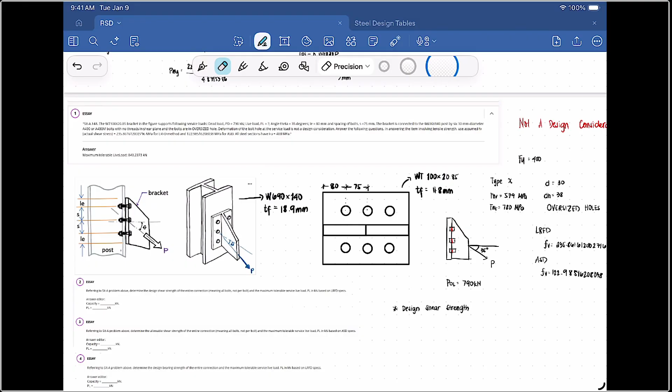So here we have WT 100 by 20.85 bracket. Let's go straight to the figure. So this is our figure. What's being pointed out here is the column, that is 690 by 140 with a thickness of flange of 18.9 millimeter.

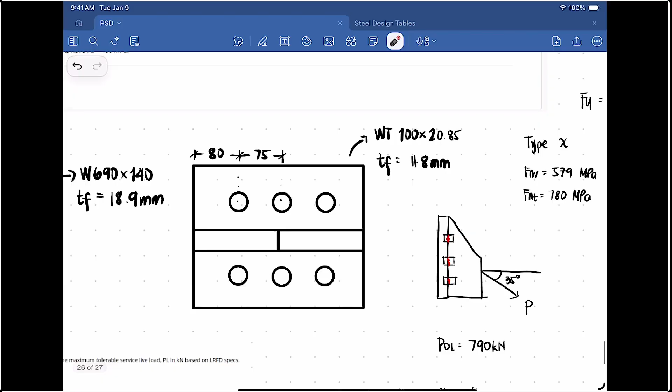So next is what connects to it, which is this. This is its top view. Here we have the bracket that was used, that's 100 by 20.85 with a thickness of flange of 11.8. It has an LE of 80 and spacing of bolts of 75.

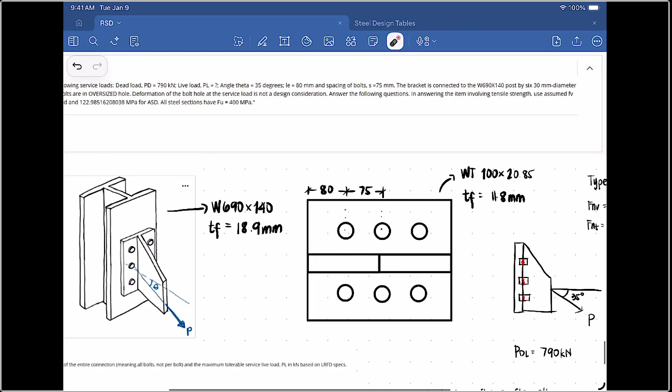And that's it. So the load, by the way, since we can see it here, theta is given as 35 degrees. So therefore, we are expecting a force combination of tension and shear.

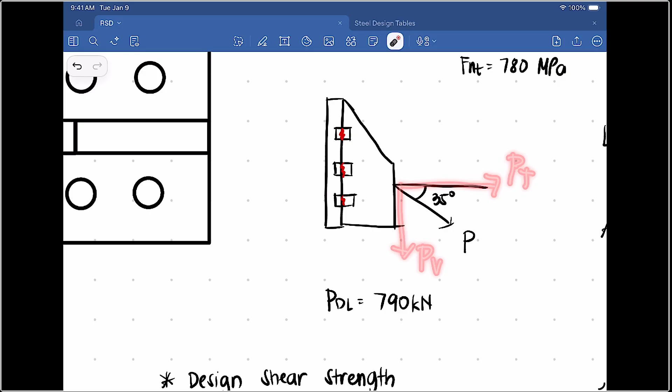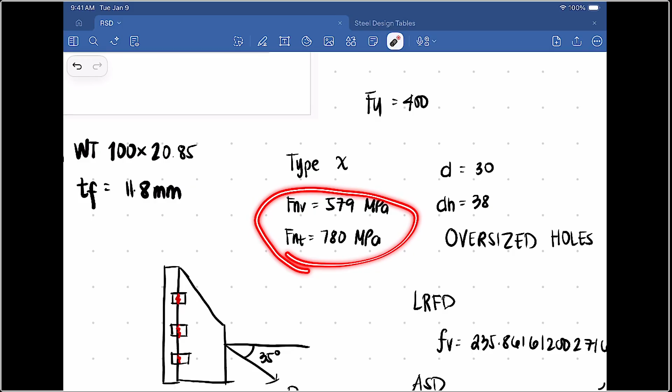So since we're using type X and it's 490 M bolts used, and it's oversized, our FNV and FNT will be this one, based from the table. So the diameter of bolts is 30. Since it's oversized, we add 8.

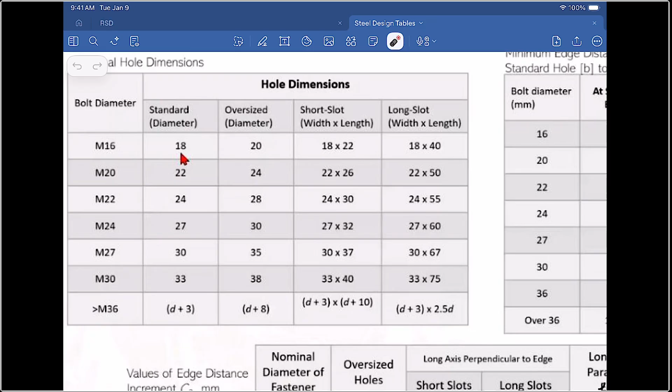We can see that here in this table. So we have 30 millimeter bolt diameter. For the hole dimensions, it becomes 38. So we have critical shear stress here in LRFD and ASD. We also have FU of 400, and it is not a design consideration.

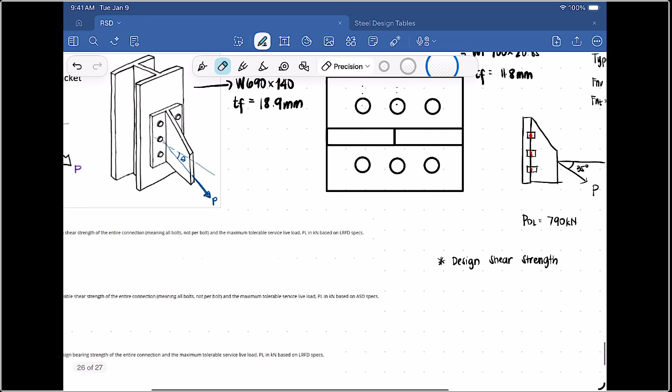So okay, let's proceed right away to number 1. For number 1, we're looking for the design shear strength. Let's proceed to writing the formula.

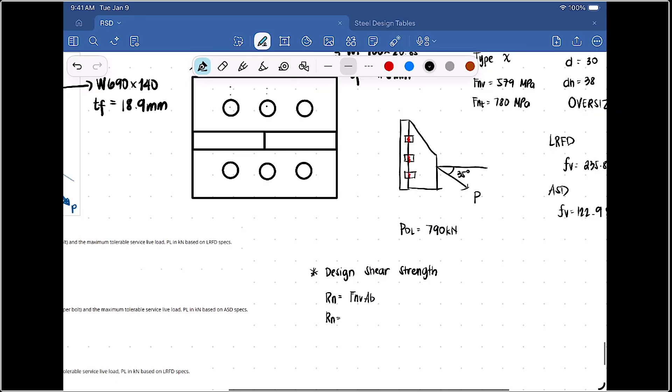It's FNV times Ab. So our Rn is going to be, let's write, 579 times pi over 4. Since this is just area of bolts, 30 is what we'll use here. So that's pi over 4, 30 squared.

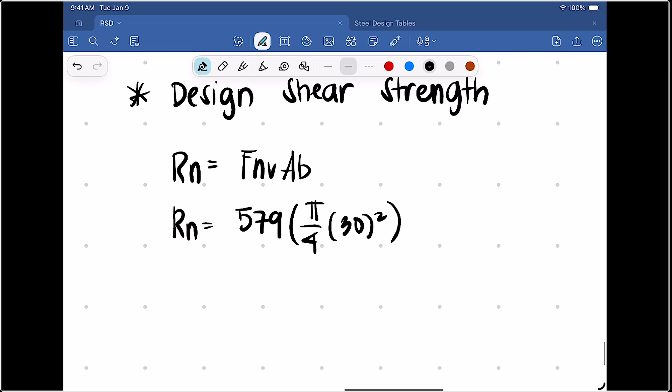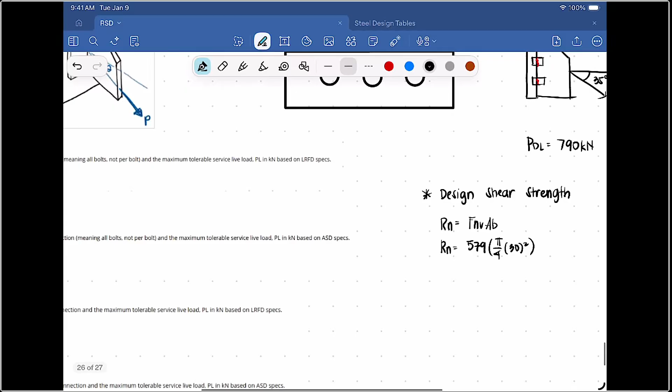Then, since in number 1 all bolts are what's being asked, we go straight to multiplying by 6 bolts. We have 6 bolts, by the way. So our Rn is going to be...

Divide by 1,000 to get it in kilonewtons. So that would be 2455.6259 kilonewtons, for all of the bolts.

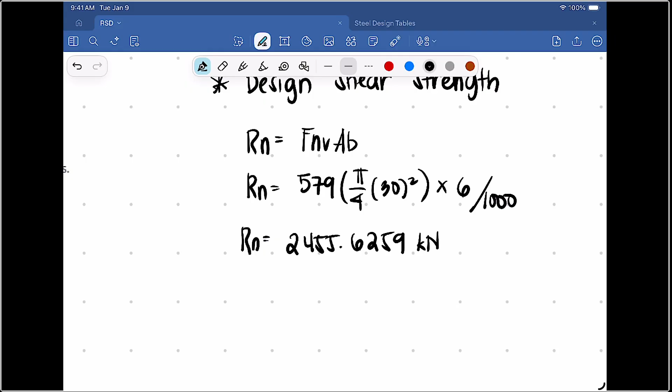Since we're doing LRFD for the first number, we will just multiply this by phi, 0.75, that will give us 1841.719 kilonewtons. Okay, let's go back to the figure.

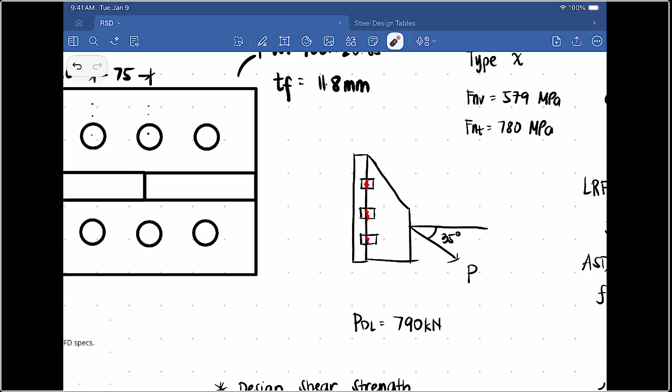Since shear strength is what we're looking for, and actually shear strength is what we just solved, this is the capacity. Let's box it. So this is in LRFD.

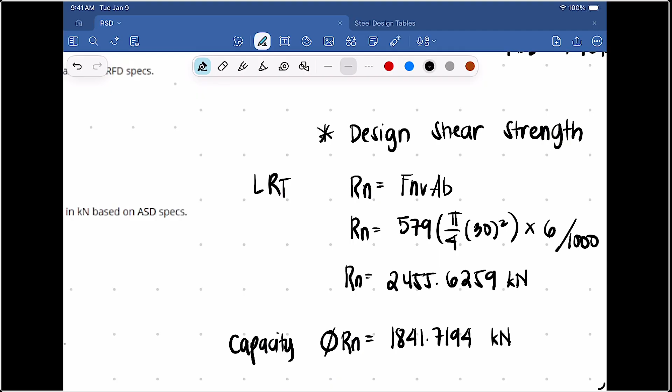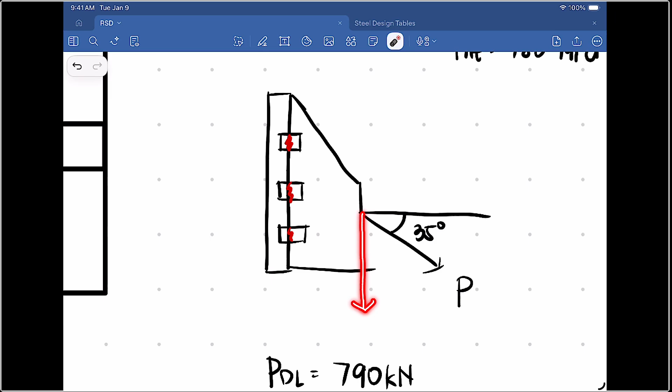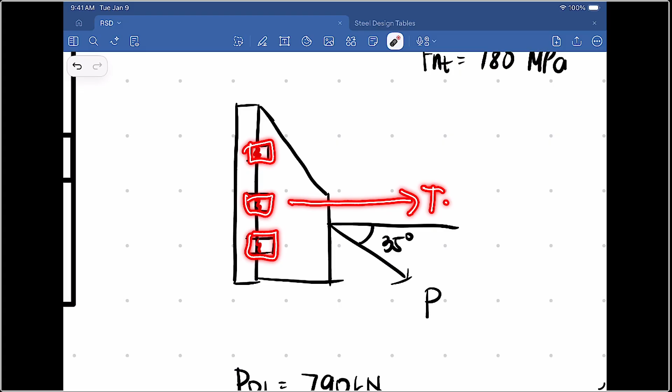Now, in finding the live load, since shear is what we're looking for, we have to find the force of this component. This is PV. Because if this is PT, this is the tension that our bolts resist, whereas this one is the shear that our bolts resist.

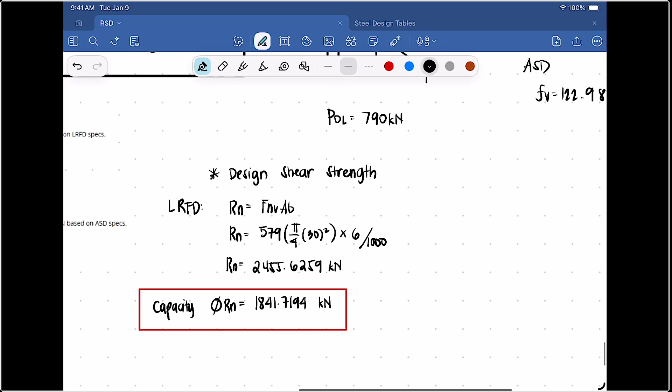So now, the capacity we solved, we equate it to the load combination equation, that is 1.2 times 790 plus 1.6 live load. Then, since our P is at an angle, let's not forget to multiply it by sine 35.

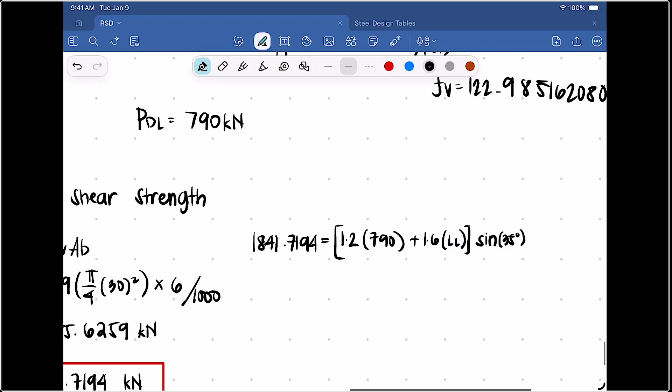So our live load for the LRFD would be, let me just type in the calculator, 1.2 times 790 plus 1.6 times x sine 35. So our live load should be 1414.337 kilonewton.

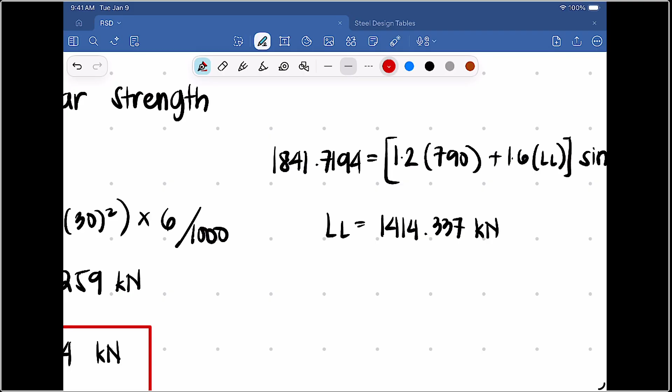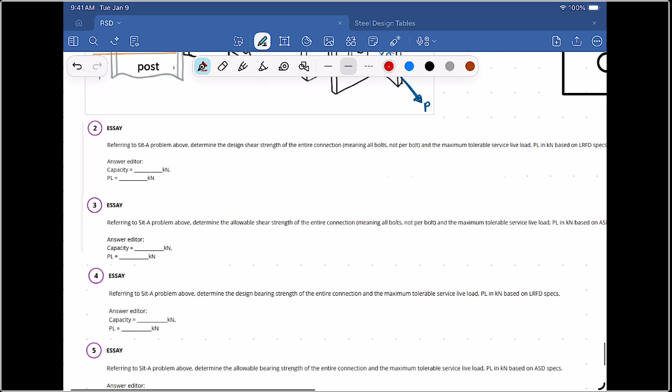There it is. Okay, we have LRFD. Now let's find ASD. So in ASD, just take the Rn that we solved and then divide it by omega.

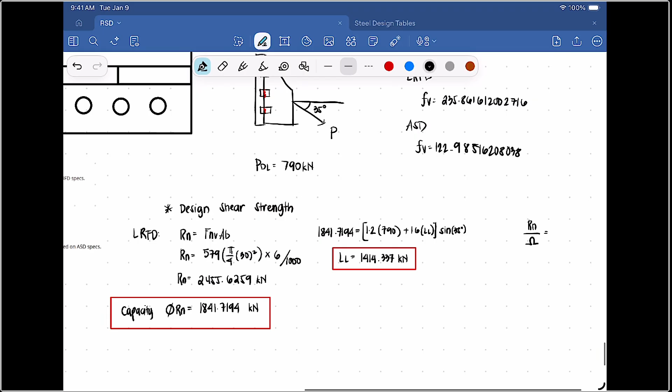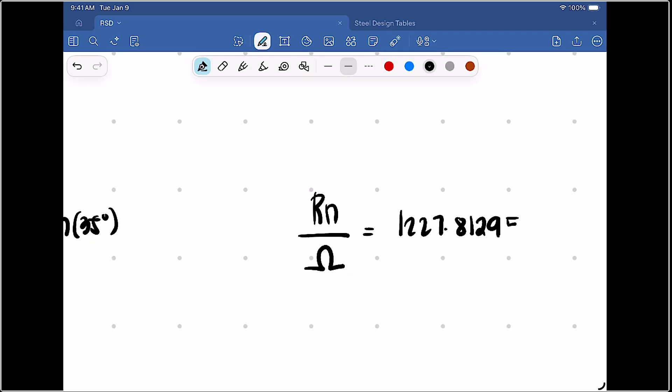I believe it was 2. Yeah, 2. So we divide 2455.6259 by 2. We get 1227.81295 kilonewtons. Then substitute right away.

This is the capacity. Let's label it ASD. Then our capacity equals the dead load, 790, plus LL.

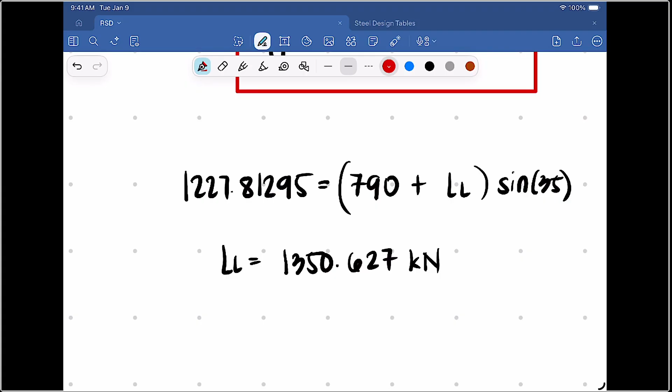Both will be multiplied by sine 35. So our live load should be 1350.627 kilonewtons. There it is. So this is our answer for number 2 and 3.

Next is the bearing strength. Let's label it bearing strength. So for bearing strength, always remember we have to consider the non-edge and the edge part.

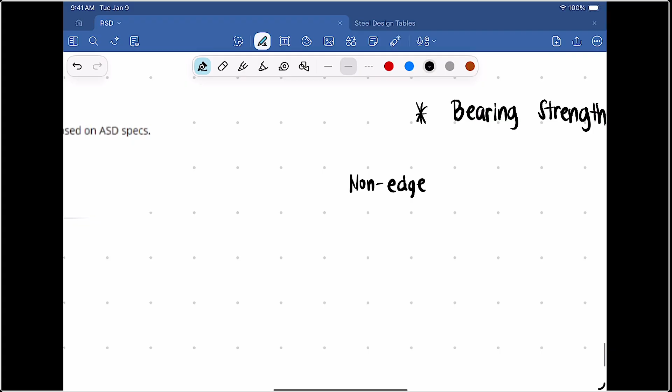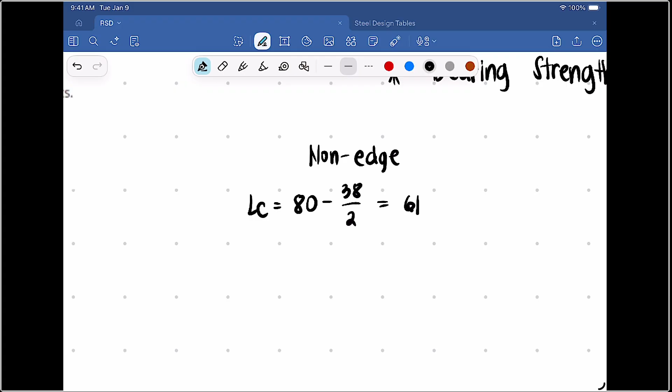So let's look at the steel design table. Okay, so we have LE of 80. To get LC, we have to subtract 80 by half of, since DH is what we'll use here, that is 38 over 2. So 80 minus 38 over 2, that is 61. Then let's check the condition if we multiply the diameter by 2, that is 60.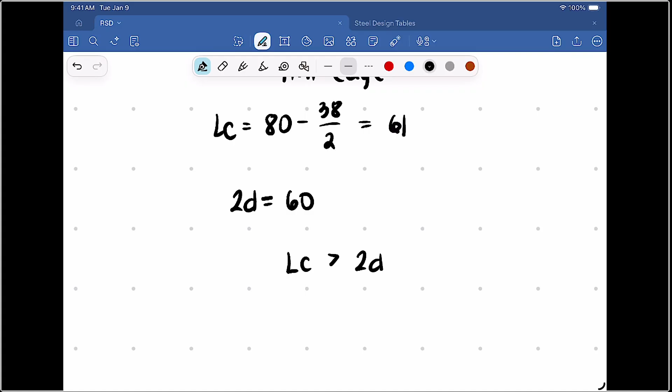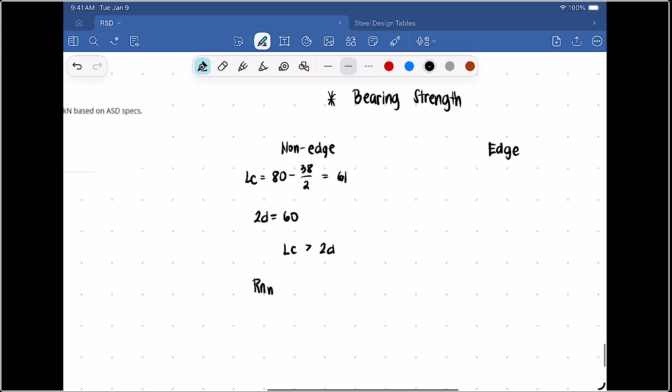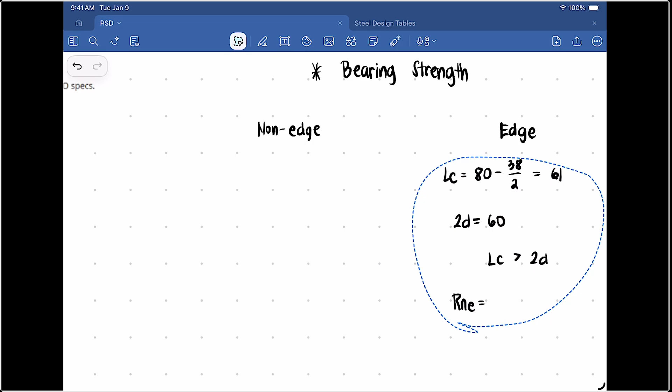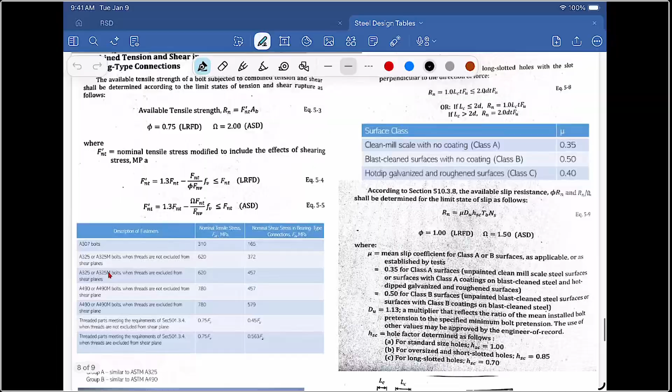So therefore, LC is greater than 2D, since 61 is bigger. So what happens here is our Rn, this is non-edge, right? Like Rn, wait... actually this should be edge. My bad, let's move this, this is edge. So let's look at the equation in the table, which is... wait, here it is.

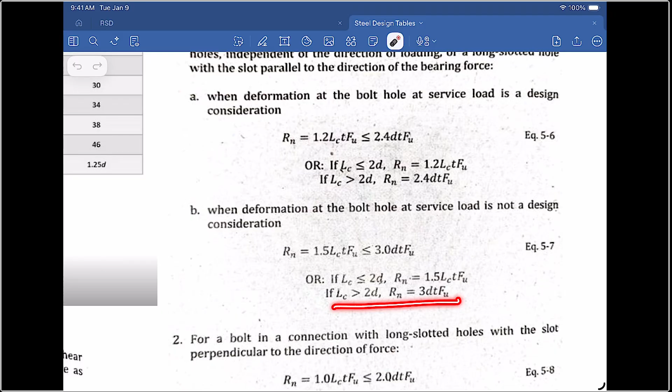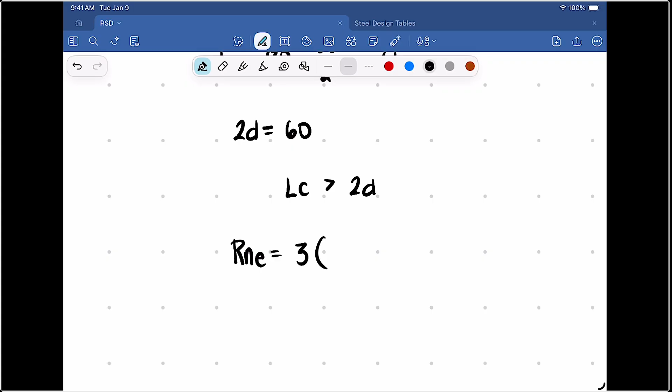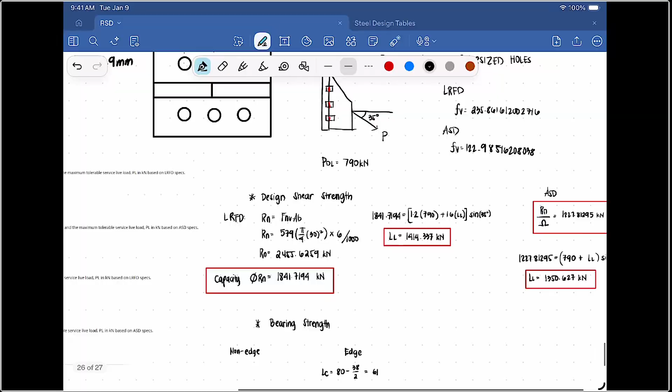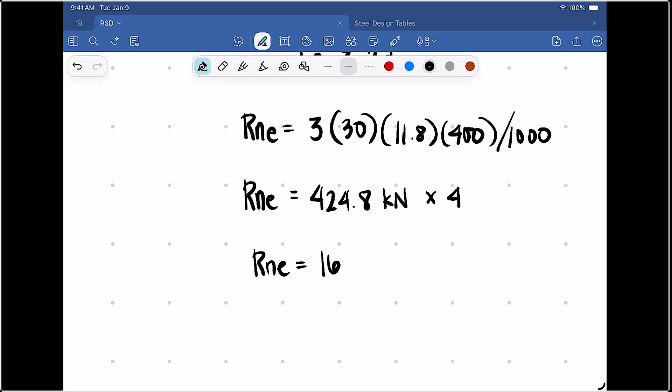Since our LC is greater than 2D, we look at the steel design table. Since it's not a design consideration, we use this: 3 times diameter times FU. So 3 times diameter, that is 30, times thickness 11.8, times 400, over 1,000. So our RNE is 424.8 kilonewtons. Since we have four edge bolts, we multiply by 4, so our RNE will be 1699.2 kilonewtons. Now let's move on to the non-edge.

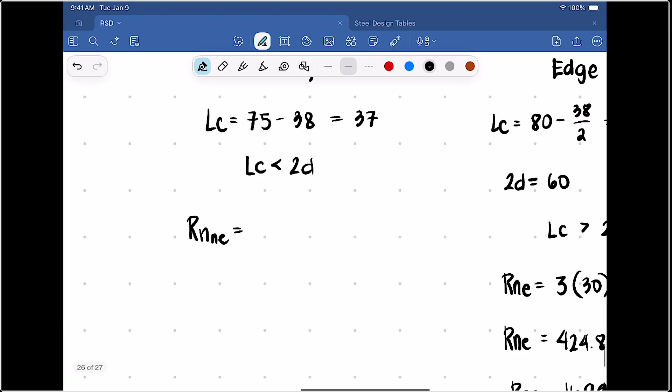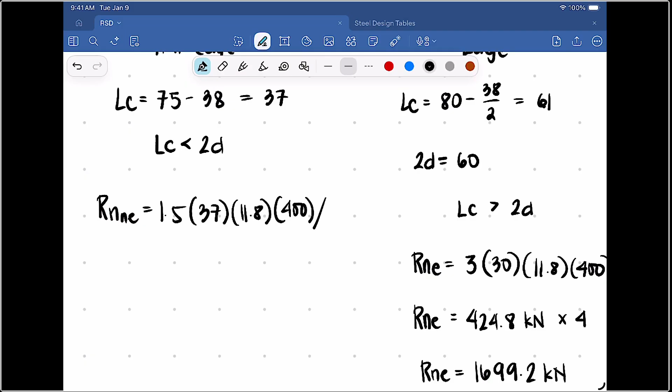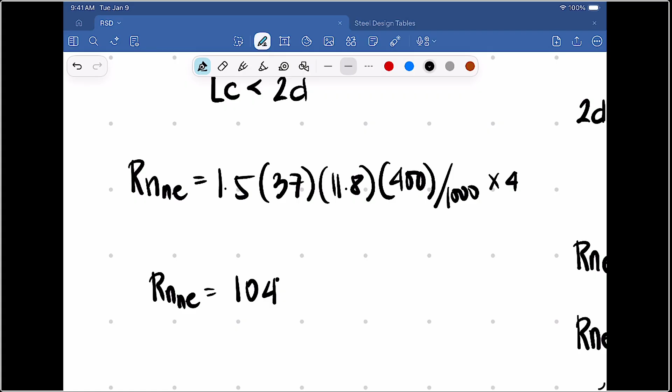So find the LC of the non-edge. We subtract 75, subtract the diameter of the hole, that is 38, from 30... wait, diameter of the hole is 38. So we have 37. Now this is less than 2D, so LC is less than 2D, therefore we use 1.5LCTFU. So RNNE is equivalent to 1.5 times 37 times thickness 11.8, times 400, all over 1,000. Then we multiply this by 4. So RNNE is 1047.84 kilonewtons.

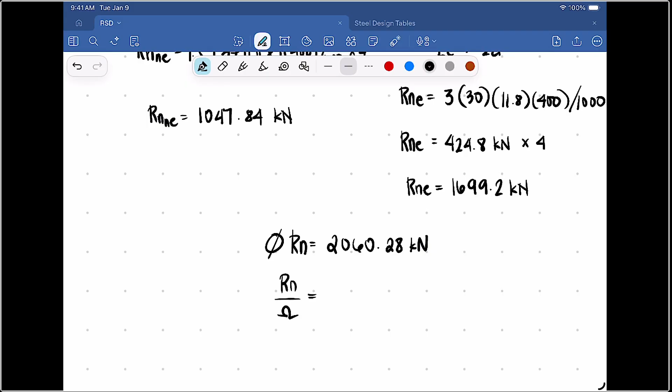So we add this. Our Rn is going to be, for phi Rn, that's 0.75 times 1047.84 plus 1699.2, that is 2060.28 kilonewtons. For ASD, we just change it to 1 over 2, so that would be 1373.52 kilonewtons.

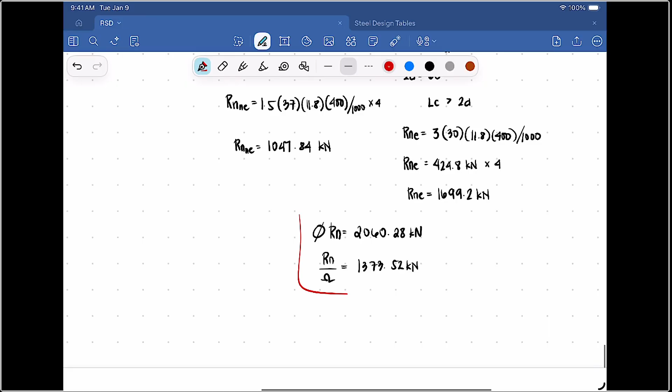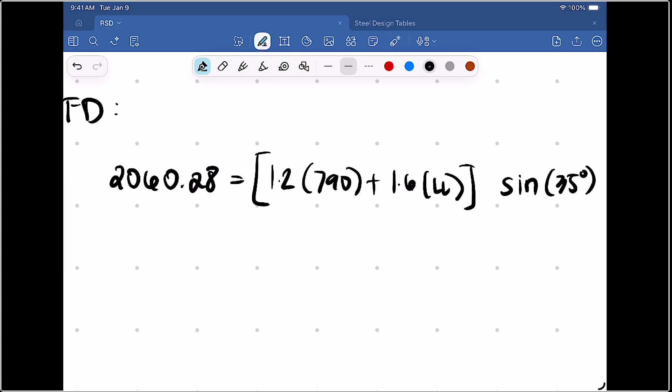This is the bearing strength, LRFD and ASD. Now let's find the LRFD live load. So again, 2060 equals 1.2 times 790 plus 1.6 live load. Since we are bearing, we still use sine 35. Let's shift solve. So our live load would be 1652.4929 kilonewtons.

Now for ASD, we equate again: 1373.52 equivalent to 790 plus LL, multiplied by sine 35... not multiplied, just equated. Then we should have a live load of 1604.6590 kilonewtons. So this is the answer for the bearing strengths.

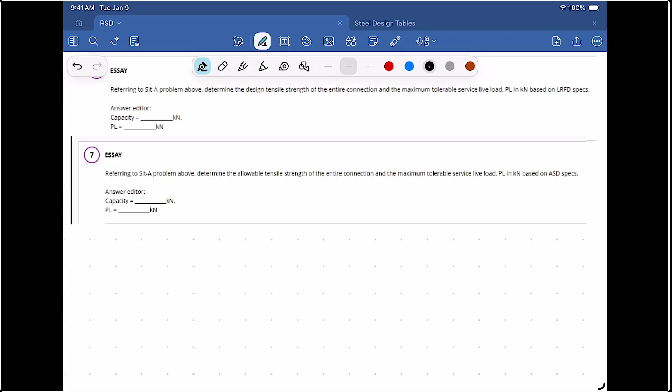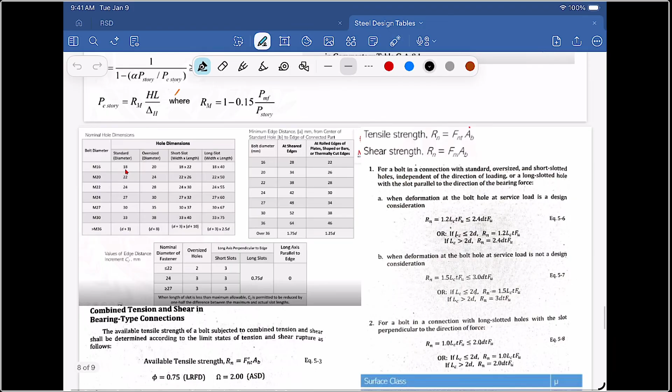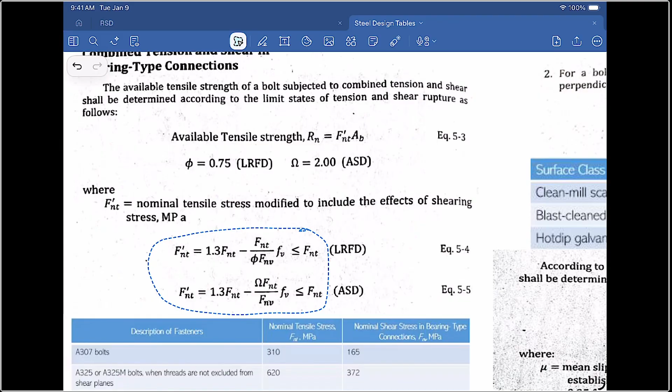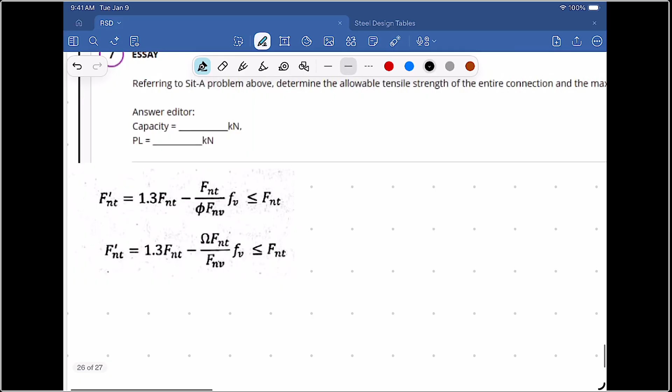Now let's do the design tensile strength. Let's look at the table for the tensile strength. However, since our load is at an angle, it has a combination of shear and tensile force, so we go to the formula for combined tension and shear in bearing type connections. Let me borrow this formula and place it here. Now, for this, we need to get the FNT for LRFD and ASD.

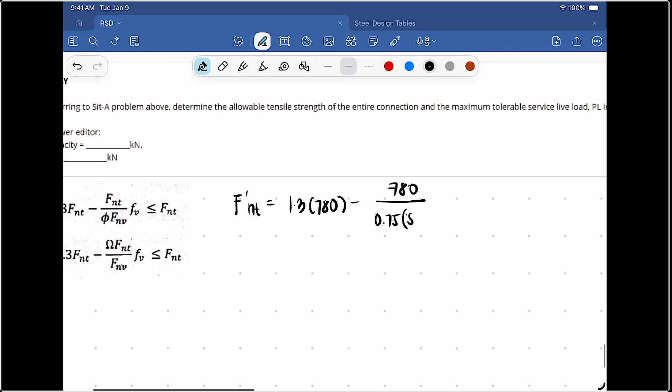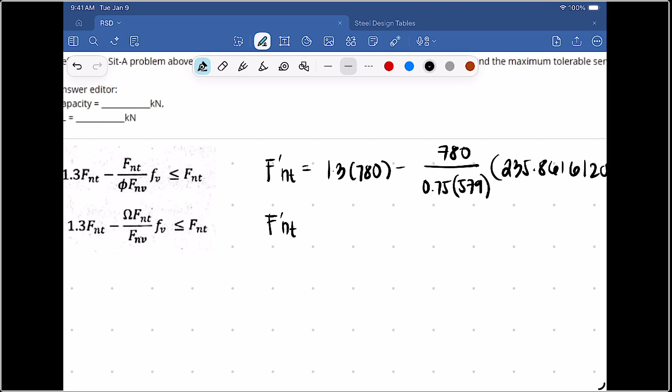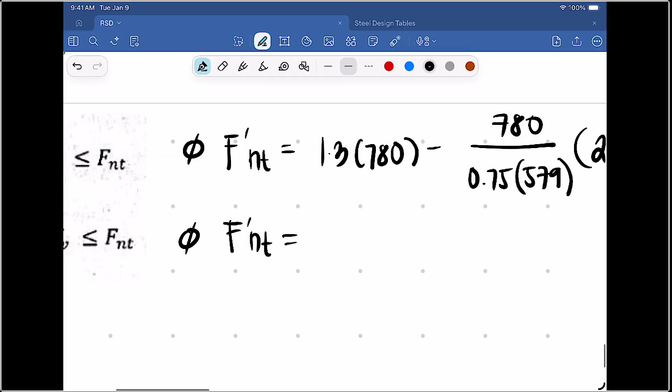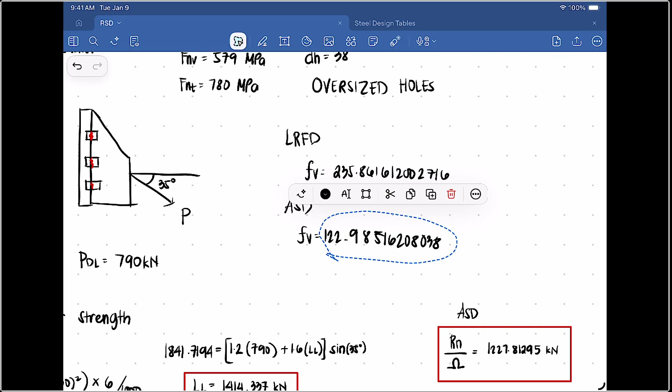Let's solve for it. We have 1.3 times FNT, which was 780, minus 780 all over 0.75 multiplied by FNV, 579, and the critical shear stress LRFD, 235. Let me copy this to make it easier. So our FNT, we label it with phi to know this is for LRFD. So for LRFD, F prime NT is 590.345 MPa. Now for ASD, F prime NT is 1.3 times 780, this will be 2 times 780 over 579, multiply by FV. So our ASD F prime NT is 682.6410 MPa. Now we have F prime NT for both.

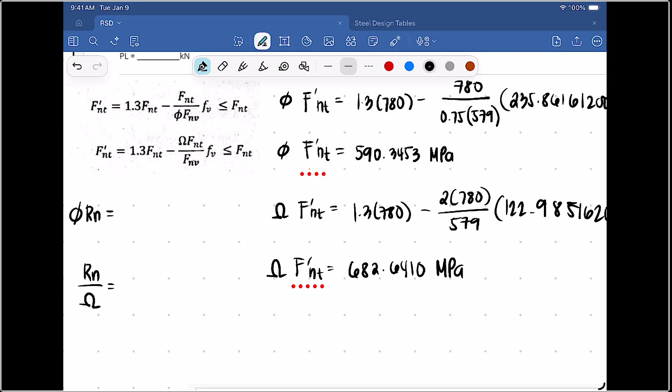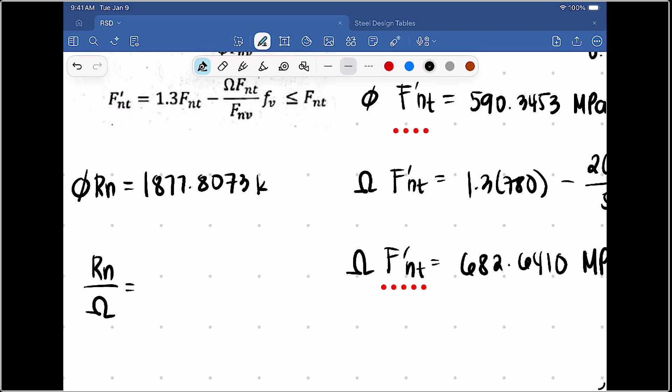We will solve right away and place it here: Rn phi and Rn omega. I won't write the formula, let's go directly to the calculator. So we have 590.3453 times pi over 4, diameter of bolt is 30, multiply by 6 bolts, all over 1,000, then multiply this by 0.75, and we get 1877.8073 kilonewtons. So this is the capacity.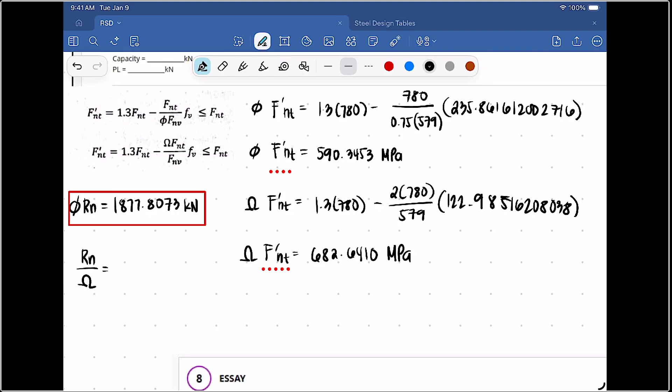Next is the omega one: 682.6410 times pi over 4, 30 squared, times 6, over 2, divide by 1,000. That's 1447.5915 kilonewtons. So this is not per bolt anymore.

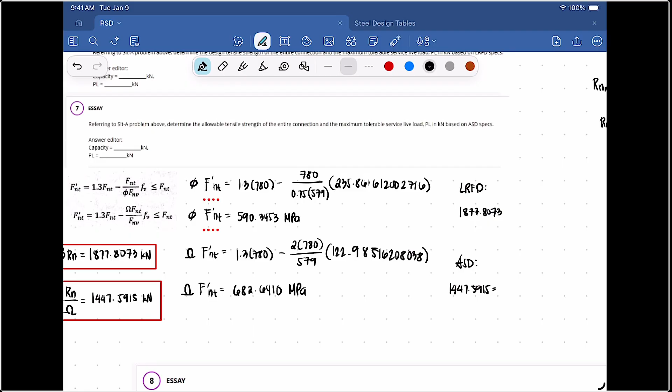Okay, so we solve for its live load. Since we're on tensile strength, the load multiplier is different. Let's go to LRFD: 1877.8073, and ASD 1447.5915. So our equation is 1.2 times 790 plus 1.6 live load. Now since we're in tension, the force we take is P cos 35. So shift solve. We get 840.2371 kilonewton.

Okay, for ASD: 790 plus LL cos 35. So our LL is 977.1829 kilonewtons. So we're done with part 8.

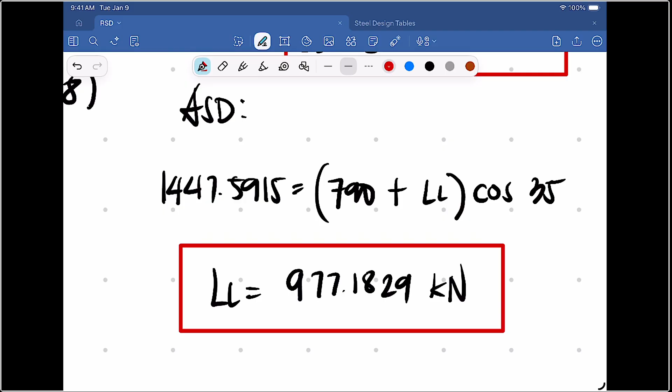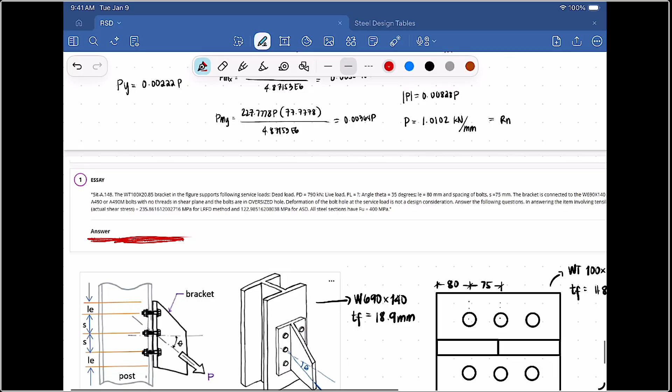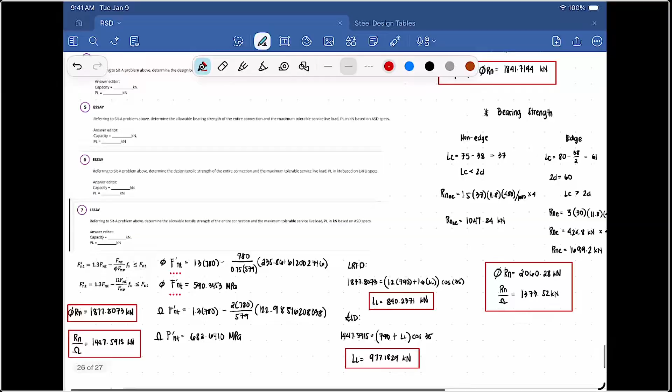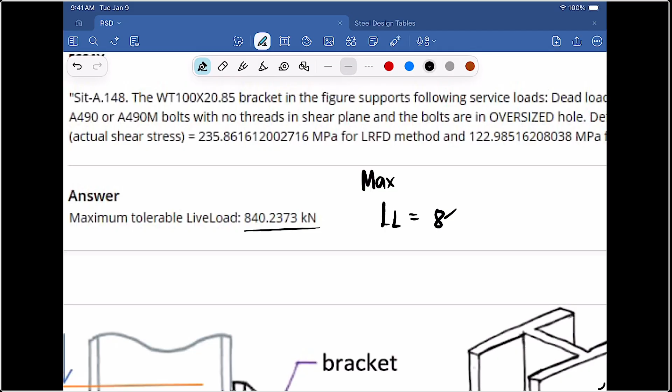But the last question now is asking for the maximum tolerable live load. When we choose the maximum tolerable live load, we have to pick the smallest live load among those we solved. So of course the smallest is the LRFD of the tensile strength, that is 840.2371. So we choose that one. So our live load, or critical maximum, is 840.2371 kilonewtons. That's it for part 1.